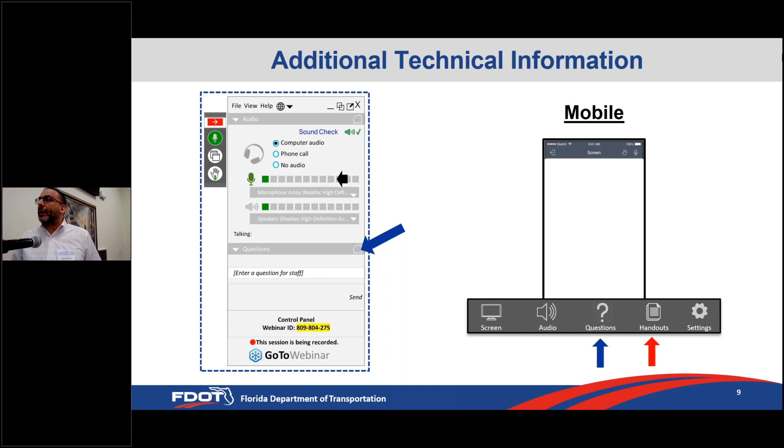Also, an ad was printed and posted in the Florida Administrative Register, as well as information shared on FDOT social media platforms and other notification methods. Slide 11, please. The next few slides will cover the non-discrimination policy and rules of engagement.

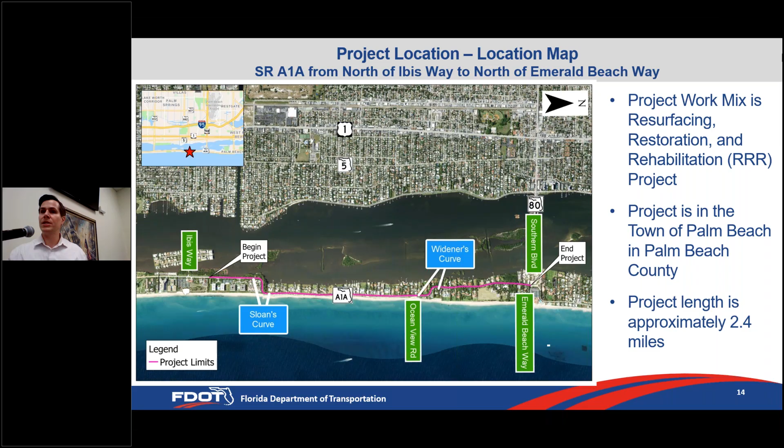The project's objective is to repave the existing roadway and improve safety. In addition to repaving the existing roadway, the following are other improvements planned on this project.

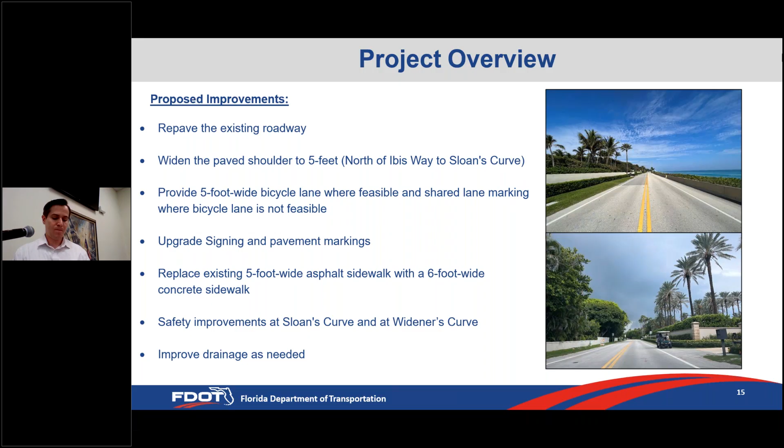Widen the paved shoulder from 3 feet wide to 5 feet wide within an existing 6-foot wide shoulder from north of Ibis Way through Sloan's Curve. Provide a 5-foot wide bike lane where feasible and shared lane markings where bike lanes are not feasible. We'll also replace the existing 5-foot wide asphalt sidewalk with a 6-foot wide concrete sidewalk, implement special signing and pavement marking treatments at Sloan's Curve and Widener's Curve, and improve the existing drainage system.

This project includes bicycle lanes and shared lane pavement markings, or SHARROWs. Bicycle lanes are being provided in the northbound direction from north of Ibis Way to south of Widener's Curve, then in the southbound direction from north of Ibis Way to north of Sloan's Curve.

SHARROWs are provided where bike lanes are not feasible, which is from Sloan's Curve to the north end of the project. SHARROWs are placed in the center of the travel lane, which lets the bicyclist command the lane and discourages motorists from passing too closely. This placement informs drivers that bicyclists can ride in the center of the lane per state law.

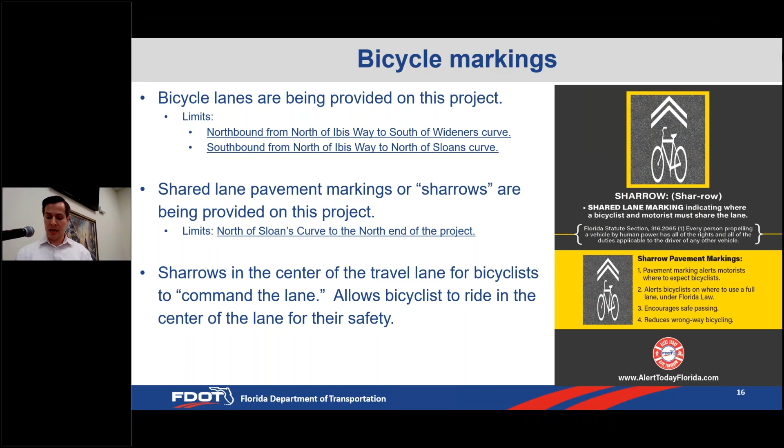The existing sidewalk is currently on the west side of State Road A1A from just north of Ibis Way to Sloan's Curve Drive. The 5-foot wide asphalt sidewalk will be replaced with a 6-foot wide concrete sidewalk for a total length of 1,080 feet. The new sidewalk will end at the same location as it does today.

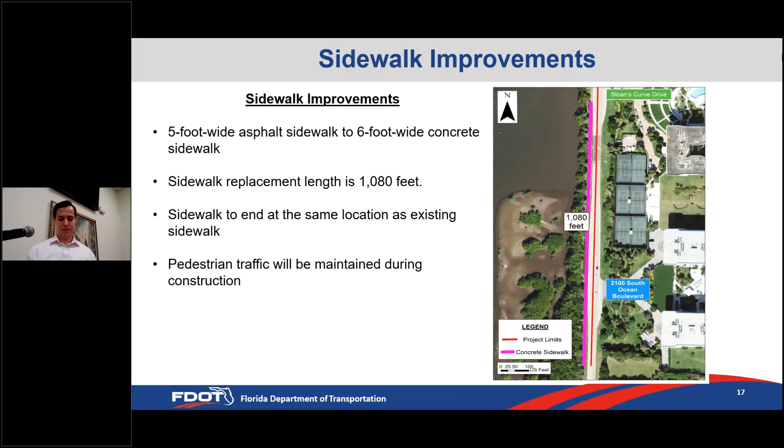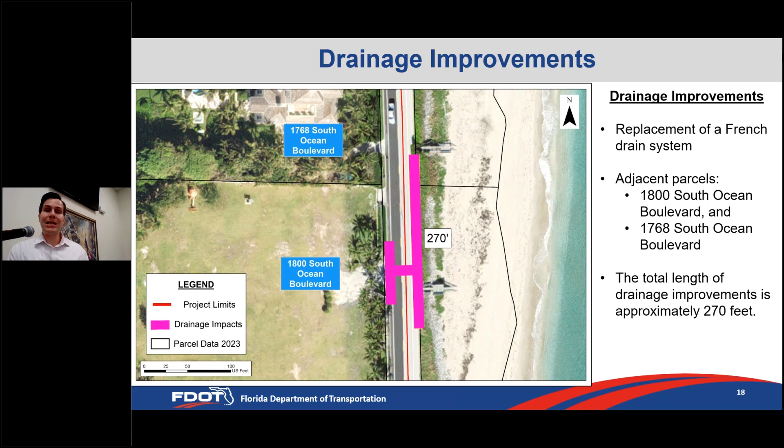This graphic illustrates the drainage improvements along State Road A1A adjacent to two properties, 1768 South Ocean Boulevard and 1800 South Ocean Boulevard. The drainage improvements are approximately 270 feet long and involve replacement of a French drain system.

The special signing and pavement marking treatments planned on Sloan's Curve and Widener's Curve to improve safety include speed reduction ahead signs, advisory speed signs, painted speed limit pavement markings, reduced speed pavement markings, and internally illuminated raised pavement markers. Examples of those applications are shown on this slide. These improvements address two safety components: speed reduction and lane delineation.

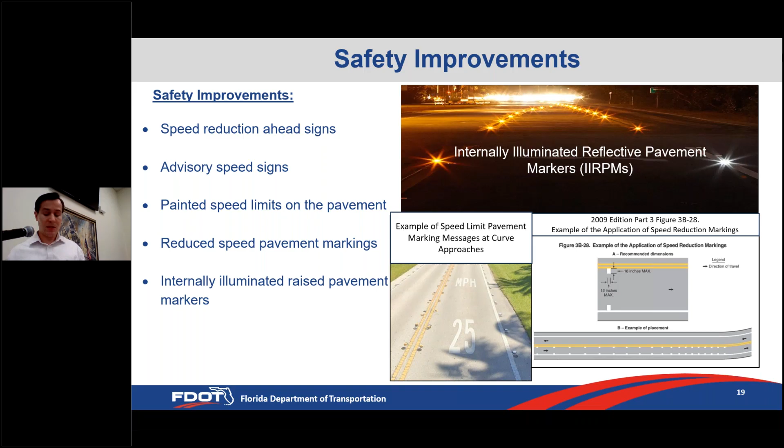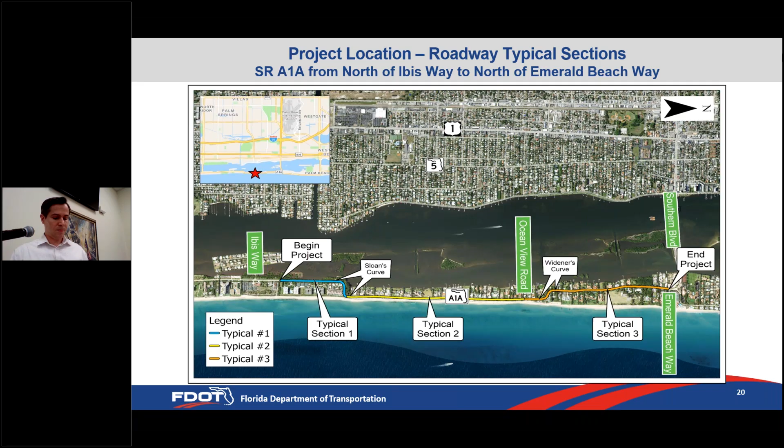The existing segment 1 typical section features two 11 to 12-foot wide travel lanes, 6-foot wide shoulders with a 3-foot wide paved shoulder, and a 5-foot wide asphalt sidewalk on the west side of the road.

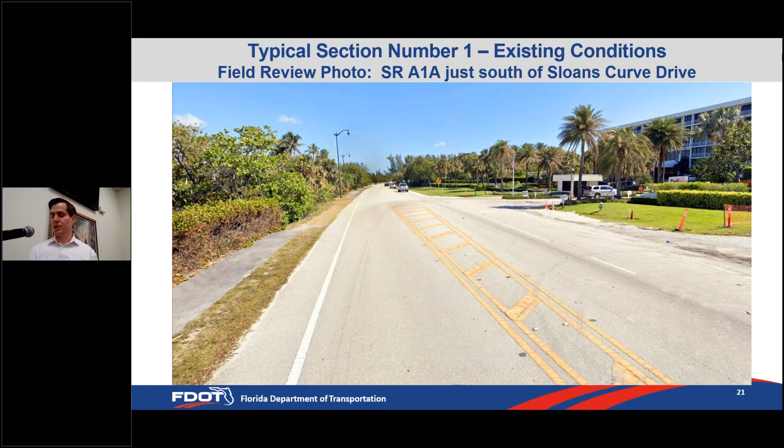The proposed segment 1 typical section features two 11 to 12-foot wide travel lanes, 6-foot wide shoulders with a 5-foot wide paved shoulder, and a 6-foot wide concrete sidewalk on the west side of the road. Marked bicycle lane markings are proposed on the northbound and southbound paved shoulders.

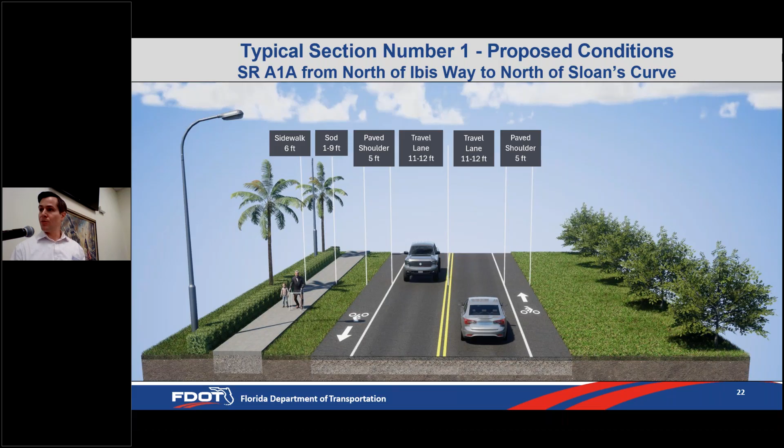The existing segment 2 typical section features two 11-foot wide travel lanes, the southbound paved shoulder with the width ranging from 0 to 3 feet, and the northbound paved shoulder with the width ranging from 5 to 7 feet.

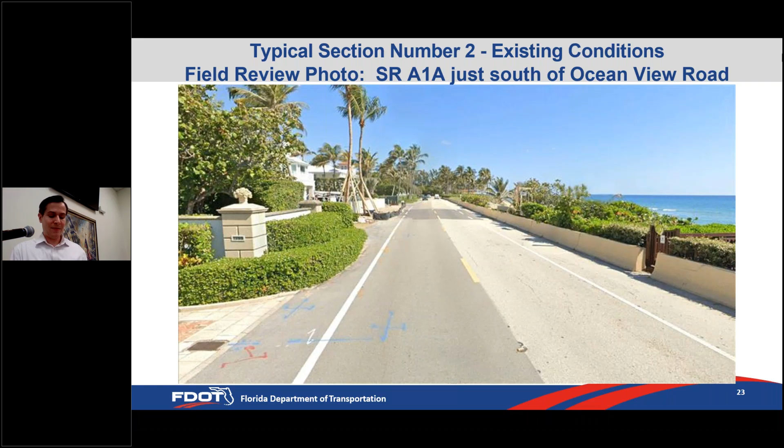The proposed segment 2 typical section features two 11-foot wide travel lanes, the southbound paved shoulder with the width ranging from 0 to 3 feet, the northbound paved shoulder with the width ranging from 5 to 7 feet, and marked bicycle lane markings are proposed on the northbound paved shoulder. Shared lane markings will be applied on the southbound travel lane.

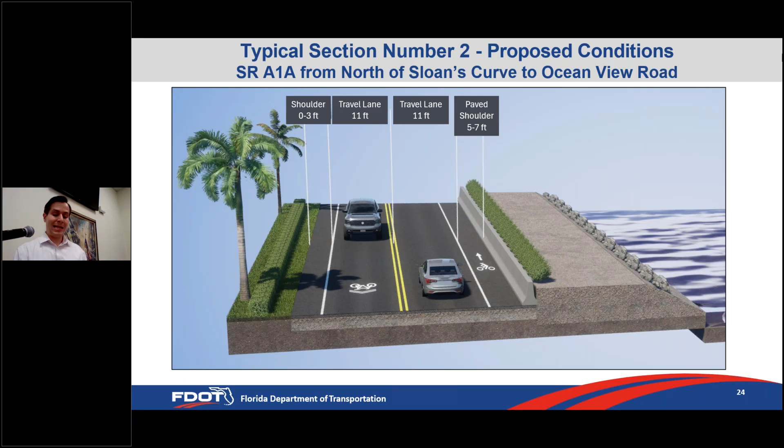The existing segment 3 typical section features an 11 to 12-foot wide southbound travel lane and an 11-foot wide northbound travel lane, and paved shoulders on both sides with the width ranging from 1 to 3 feet.

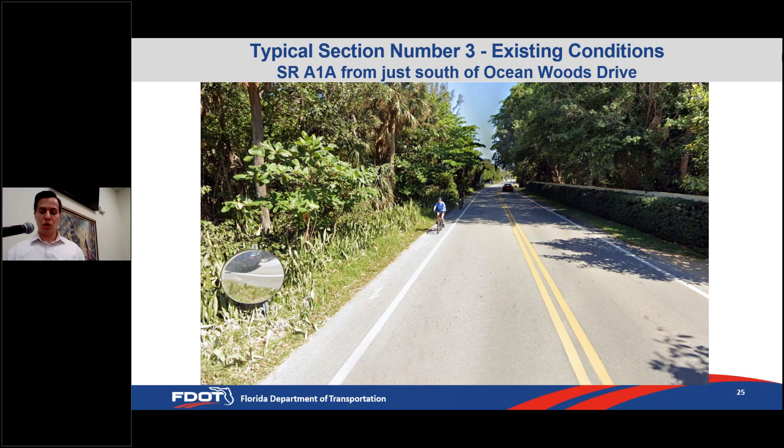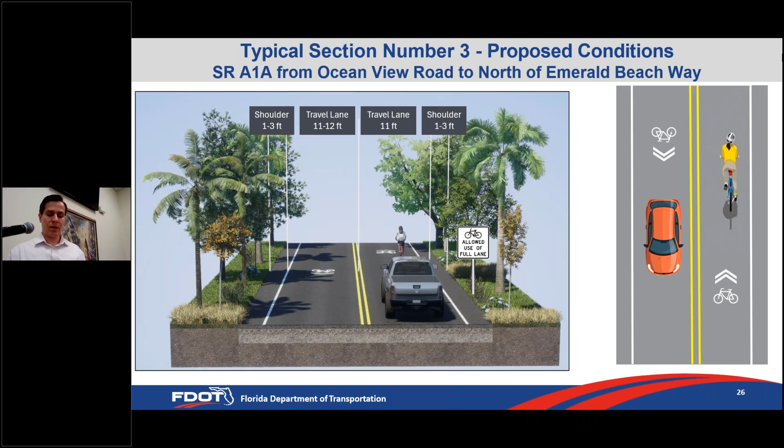The proposed segment 3 typical section features an 11 to 12-foot wide southbound travel lane, an 11-foot wide northbound travel lane, and paved shoulders on both sides with the width ranging from 1 to 3 feet. Shared lane markings will be applied on the northbound and southbound travel lanes.

Construction on this project will be achieved in 3 phases. In phase 1, the sidewalk and drainage improvements will be constructed, with lane closures during daytime and nighttime hours. In phases 2 and 3, the shoulder widening will occur, followed by repaving operations, with lane closures during daytime hours.

These temporary lane closures provide room for improvements to be constructed on one side of the road while maintaining traffic on the other side. Then the lane closure will be shifted to the other side to continue construction.

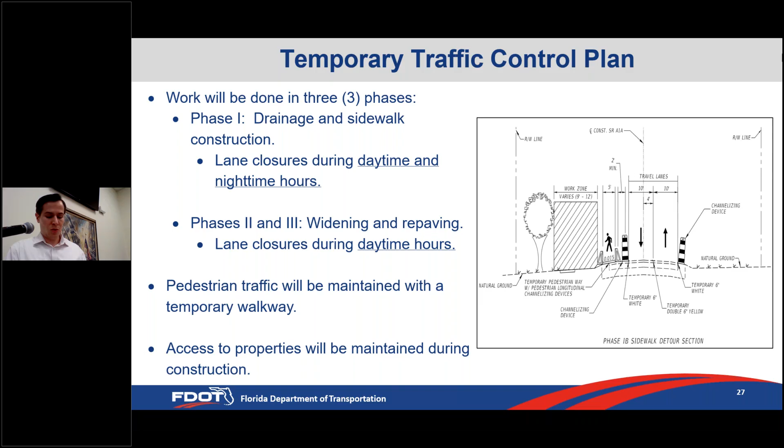Going back to the drainage improvements, in phase 1, the drainage improvements on both the 1800 block and 1768 block will be constructed. The drainage area is approximately 270 feet long, and we anticipate construction duration to be approximately 6 weeks. A flagger will be used to maintain traffic operations through the work zone.

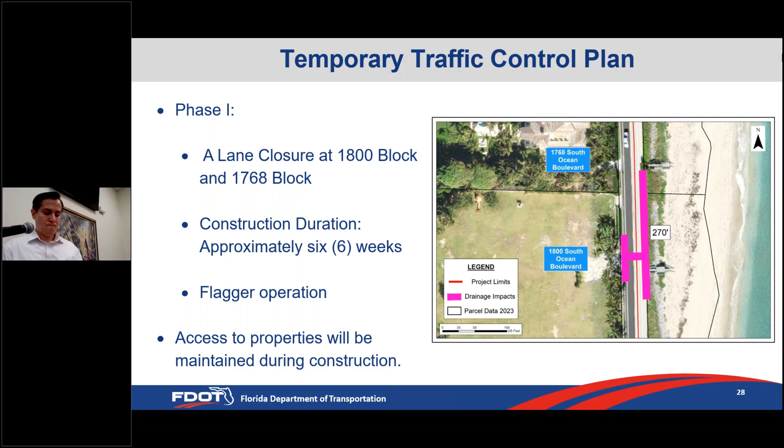With this plan, the contractor will temporarily close one lane, excavate to do the drainage improvement or replacement, and then restore the area. Once the lane is restored, the contractor will switch the lane closure to the opposite lane and complete the drainage improvements.

An objective undertaken in our design was to avoid impacts to the existing decorative features on State Road A1A.

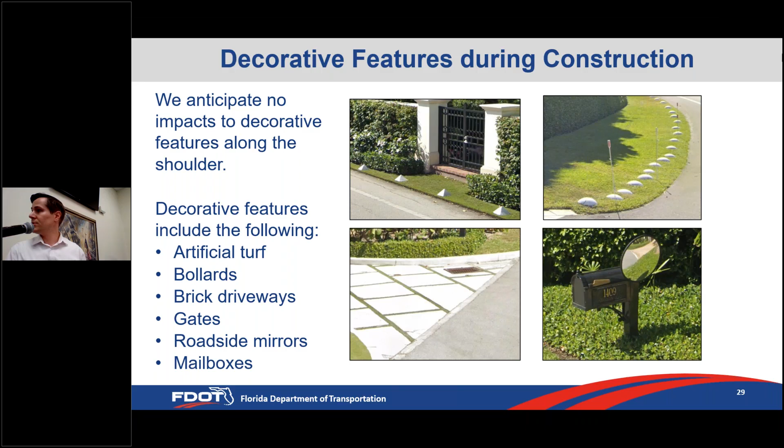The design of this project's improvements will conclude by August 2025. The project is expected to be let for construction in December 2025. Estimated construction start is spring of 2026, and estimated completion is spring 2027. The estimated construction cost is $3.2 million.

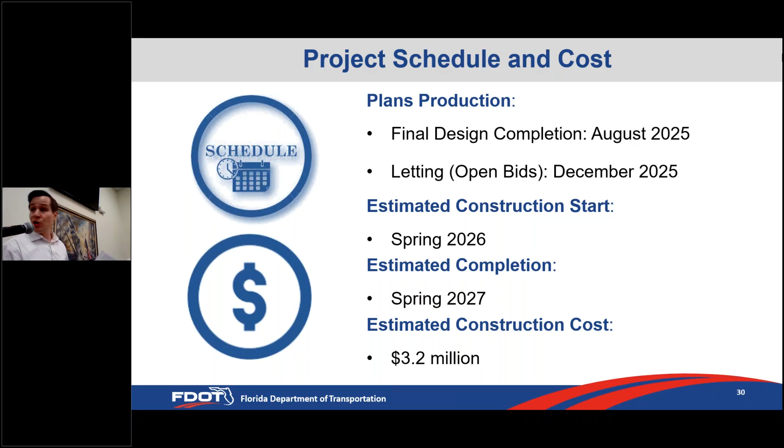There are several methods to provide and submit comments, either in person, virtually, by email, by mail, or by phone.

Virtual attendees are welcome to ask a question or provide a comment by utilizing the question panel or raise hand button on the GoToWebinar control panel.

Once your microphone is unmuted, please provide first your full name and then your question or comment. Your microphone will remain unmuted until the question or comment has been fully addressed. If your question is not responded to during the meeting, a response will be provided in writing following the public meeting.

Those participating in person may ask a question by completing a speaker card and providing it to a member of the project team. Speaker cards are available at the sign-in table and may also be requested from a member of the project team. If you're currently holding a speaker card, please provide it to a member of the project team.